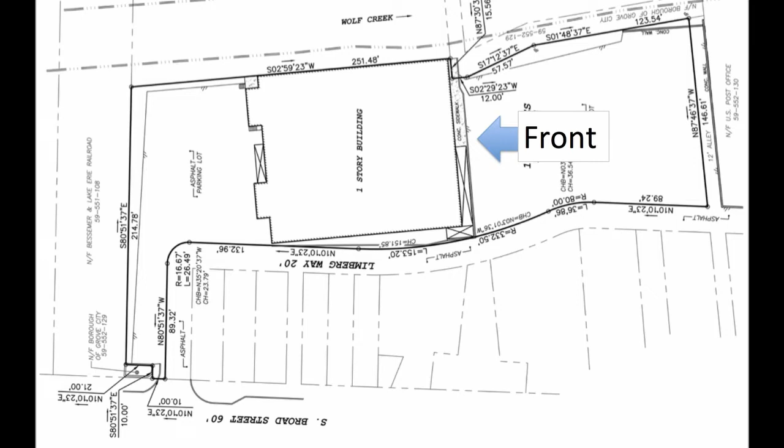We are pleased to announce that the 60-day due diligence period is complete, and we are moving forward with the project. This is going to be a huge undertaking, and we are going to need everyone's help.

It will be half the work and half the cost of a new building, but it will still require all hands on deck. I hope by the end of this evening that you will sign up to help us in specific areas of the design and execution of the project.

I'd like now to give you a virtual tour of the building and hope you will be thinking about how you can help us with this project as we go through the building.

When you enter the building through the double doors shown in the photo, you are greeted by a large, airy foyer, which gives access to the 2 rentals and the Steigerwalds showroom, which will be our cafe and welcome area. We will continue to rent to Treehouse Speech and Rehabilitation and Berkshire Realty, which will help offset the cost of the mortgage. The rentals take up about 20% of the 20,000 square foot building.

Our current building is 8,000 square feet. You will be seeing floor plans a lot during this presentation. They show the layout of the rooms as if you were looking down at the building from the sky.

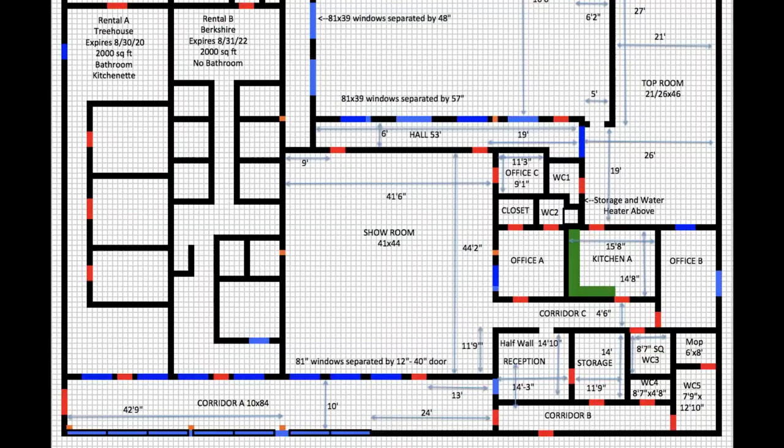Now, let's look at the whole floor plan again and talk about the unfinished shop areas. The shop area, which is heated but not cooled, comprises about half, 9,000 square feet, of the building. On the right, the kitchen door opens to the top room, which opens to the finish room.

The showroom opens to a hall with windows that look into the main shop area. The back contains a shop office, loading docks, storage, and mechanical rooms. Note the position of the roof support columns as they impact the layout of the sanctuary.

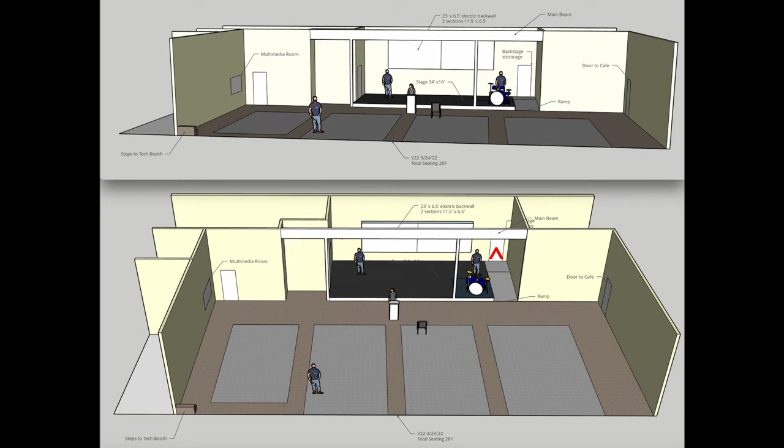There is a door to the hall and cafe on the right, and to the storage area on the left. There is also a door to a small backstage storage area. In Phase 2, a couple of years down the road, we could expand the sanctuary into Rental B to create a 456-seat sanctuary.

The tech booth was placed to the left, so it would not need to be moved in Phase 2. House sound will be mixed from the back of the house using an iPad.

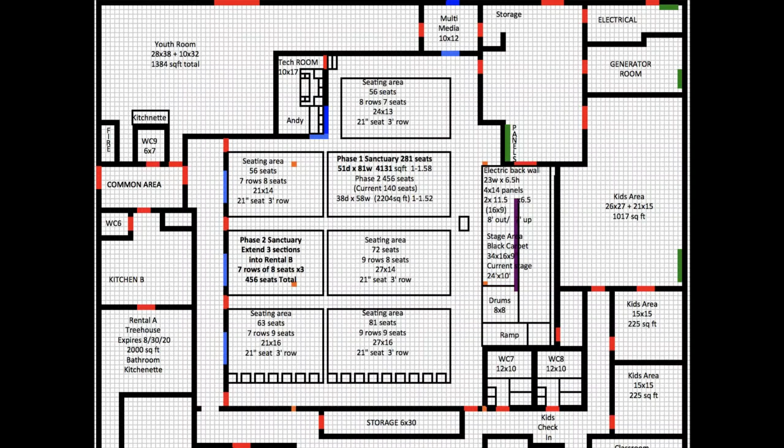The youth area is at the back left of the building. It was designed to have a separate entrance from the building's side door through the common area. It has its own bathroom and kitchenette and a loading dock door at the back left of the building.

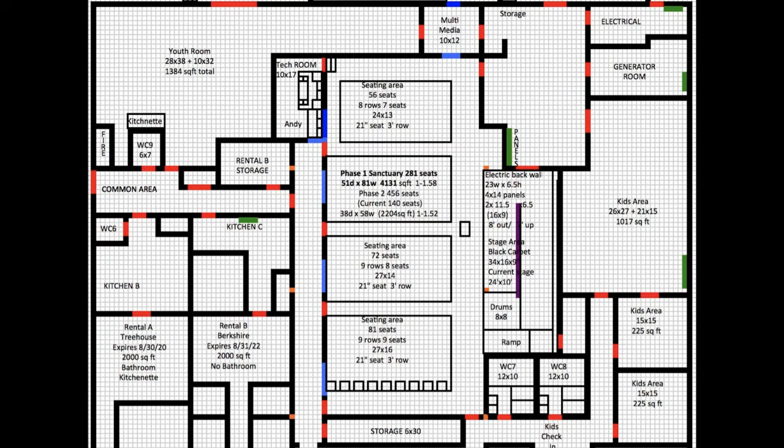The kids area is located on the right side of the building, the Wolf Creek side, and extends forward all the way to the kitchen and the pastor's office.

The kids' main area is at the top right. The kitchen door and the pastor's window are at the bottom right. There are 3 classrooms in this area.

The kids' area is accessed by a hallway from the cafe. There is 1 existing and 2 new bathrooms in this area.

This plan also shows a storage area for the cafe that has been created from the hall that separated the shop and the showroom. This would be for extra tables and chairs.

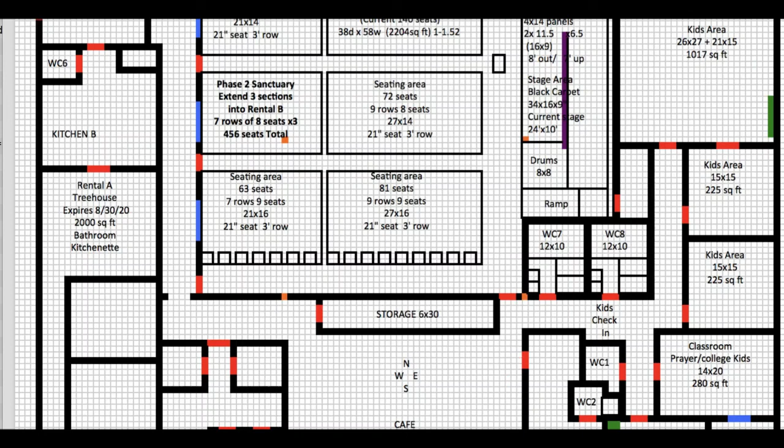Here's the kids' area plan again. You can see how the cafe feeds to the sanctuary on the left and the kids' area on the right. It works the same way in Phase 1 and Phase 2.

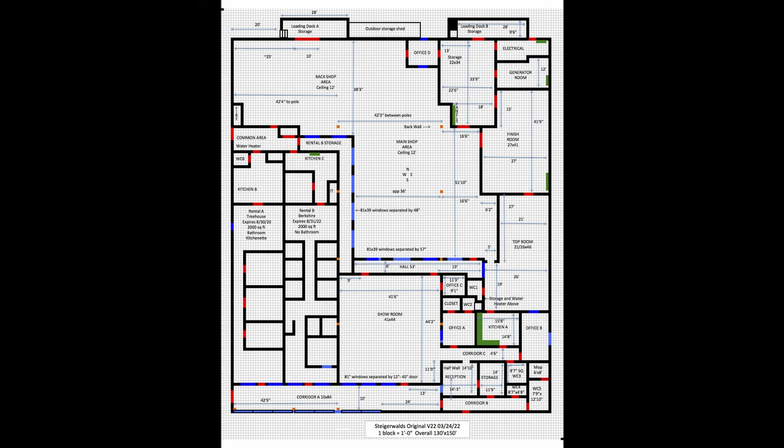Our next step will be to get stamped drawings of the building as it is now and get an estimate on the work needed to move the building from a mercantile to an assembly occupancy permit. That will allow us to get into the building and start work as soon as the sale closes at the end of August. After that, we will need to hire an architect and a contractor, finalize the layout of the building, get final heating and cooling quotes, and get the equipment on order, as the lead time is currently estimated at 6 months.

The feedback form also provides some insight into the other things that we will need to do.